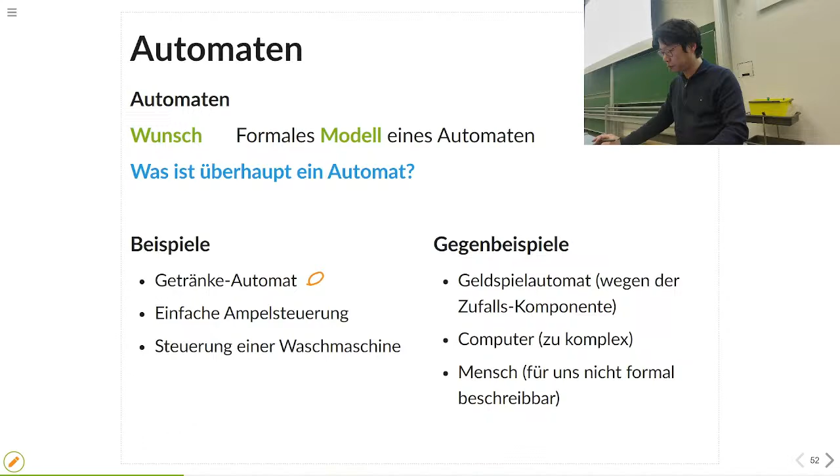Das brauchen wir Automaten. So, was bedeutet hier? Wir brauchen ein formales Modell vom Automaten. Automaten kann man schon früher bei Getränke kaufen oder Snack kaufen kennen. Das geht natürlich mit solchen Automaten und man kann auch mehrere Dinge damit steuern.

So, was ist ein Automat? Wir können Automaten benutzen, sodass wir Eingaben verarbeiten. Automat erzeugt auch eine Ausgabe. Es ist immer in einem Zustand an jedem Takt. Als Arbeit eben nur immer in Takten, und es ist ganz deterministisch. Wenn wir gleiche Inputs, gleiche Eingaben haben, produzieren wir immer gleiche Ausgaben. So, was ist ein Automat?

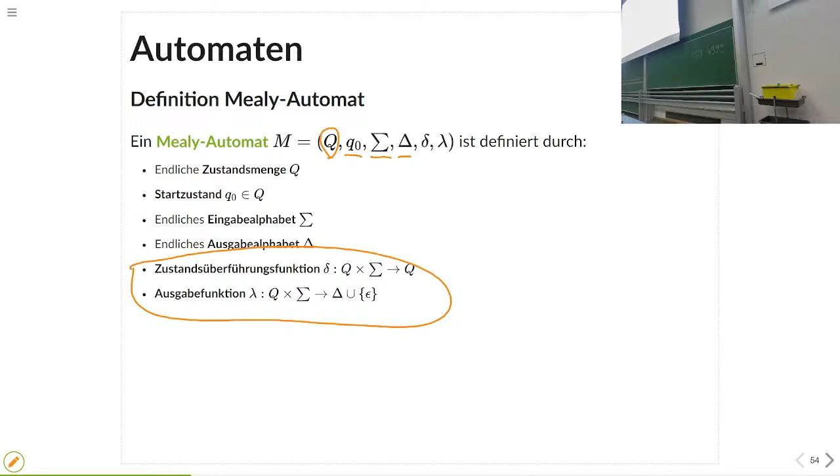Und dann haben wir zwei Dinge. Erstens ist diese Zustandsüberführungsfunktion. Wir sind jetzt in einem Zustand. Wenn wir eine Eingabe bekommen, sollten wir zum anderen Zustand übergehen, und wir definieren solche Überführung mit der Funktion Delta.

Delta, kleines Delta, ist deswegen ein Cartesian-Produkt von Q, also dem Zustand wo wir jetzt sind, und dem Eingabealphabet. Also Q mal Sigma. Für jedes Q, für jeden Zustand und jede Eingabe sollten wir zum anderen Zustand gehen oder gleich im gleichen Zustand bleiben. Das ist eine Funktion mit zwei Eingaben, ein Element von Q und ein Element von Sigma.

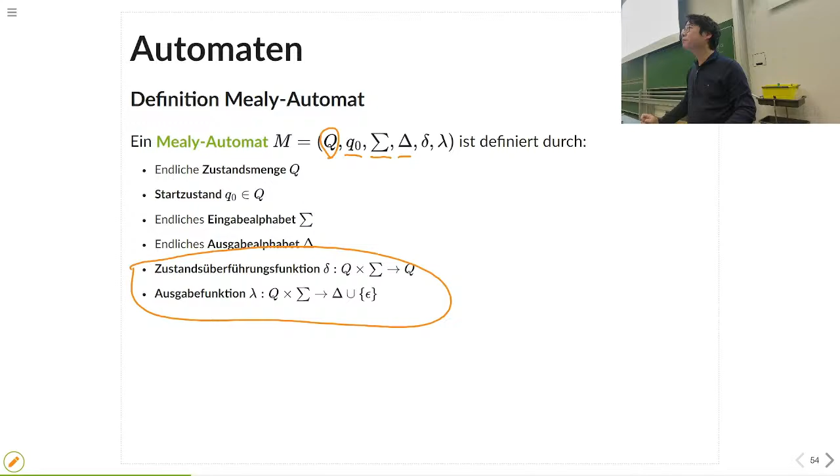Großes Q ist unsere Zustandsmenge. Großes Sigma ist unser Eingabealphabet. Die zwei zusammen nennen wir Eingaben, und es ist eine Funktion mit den zwei Eingaben. Dann produzieren wir einen neuen Zustand, und dieser neue Zustand ist unser Ziel. Wenn wir in diesem Automaten in einem Zustand sind und eine Eingabe von Sigma bekommen, dann gehen wir zu einem neuen Zustand. Okay, bisher ist es alles in Ordnung oder nicht?

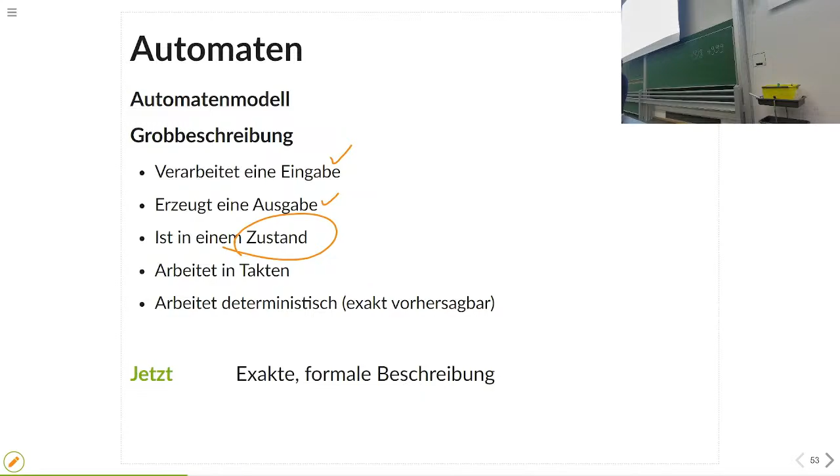Ich nenne noch einmal zurück. Wir haben ein Automaton. Was ist ein Automaton? Es gibt Zustände, es gibt Eingaben, es gibt Ausgaben. Wir nehmen an, dass wir endlich viele Zustände haben. Diese Menge, diese Elemente von Zuständen, ist die Menge Q. Dann haben wir alle Zustände, und dann haben wir ein paar Eingaben, Sigma.

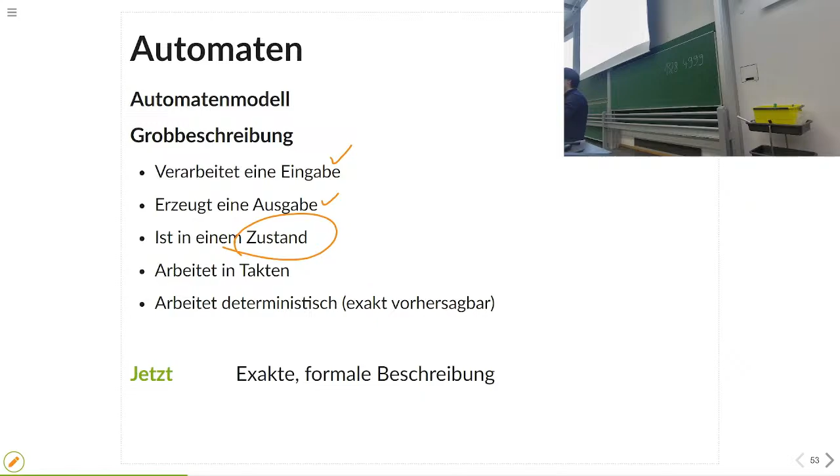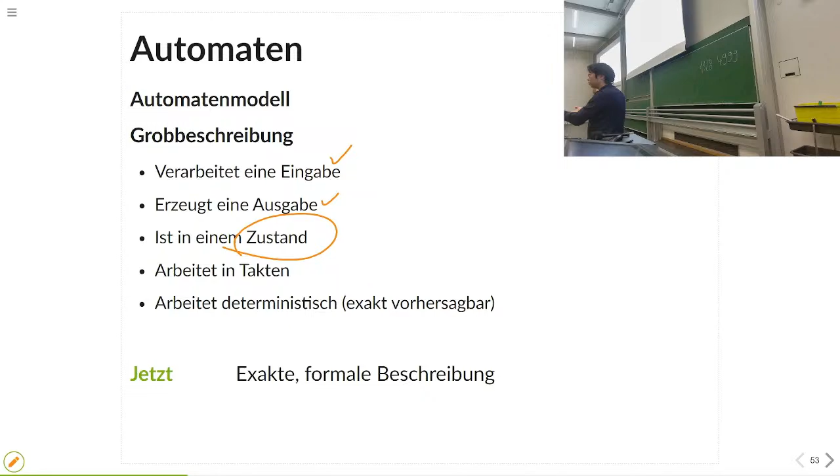Für jeden Zustand gilt: das Automaton kann zu jeder Zeit nur in einem Zustand bleiben. Deswegen müssen wir, wenn wir eine Eingabe bekommen, von Zustand zum Beispiel kleines Q mit Eingabe 1, entweder zu einem neuen Zustand führen oder im gleichen Zustand bleiben. Deswegen brauchen wir diese Überführungsfunktion. Das ist mit Sigma, mit Delta definiert.

So, bis hier alles in Ordnung oder nicht? Wir haben von hier bis hier schon diskutiert. Any question about it?

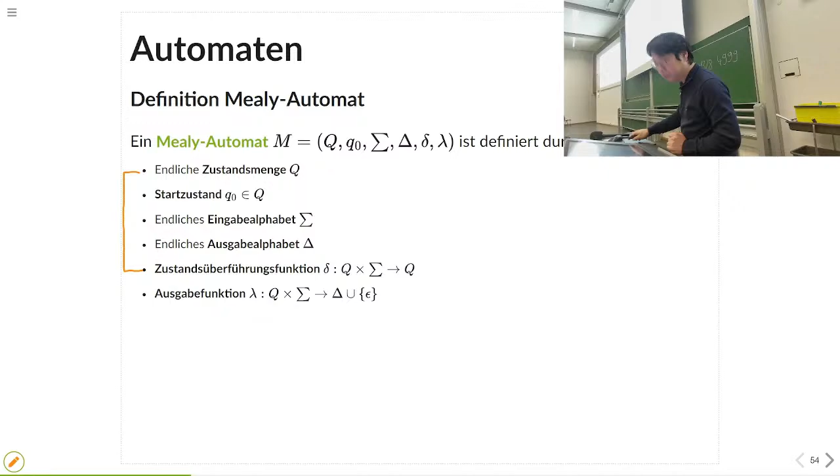So basically, if I understood it correctly, kartesisches Produkt von Q and Sigma, so basically it's like here a combination of the state and so let's say I have 10 states, I have 2 inputs. So if you are in state, you have 10 states encoded from 0 to 9, 2 inputs encoded as A and B. If I'm in state 0, I receive A, I have to go to state 9. Okay, I have to define the transition of the automata according to the current state and the input it receives. How do I move to the next one? Think about how you design automata. It's always like that, yeah.

So it kind of depends on the input and... No, the previous... you have to define everything starting from the states you have. If you are in state X, you receive input A, where do you go? You have to define that, and you have to define that completely. So either you go to the next state or you can stay in the same state, or you have to change to a new state.

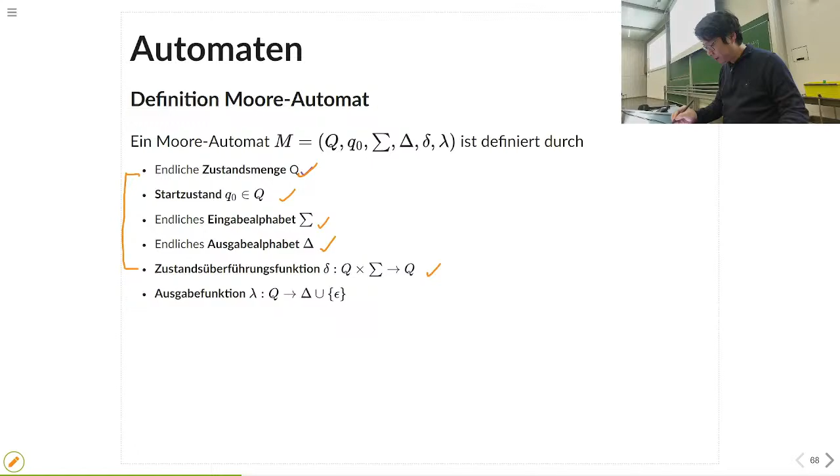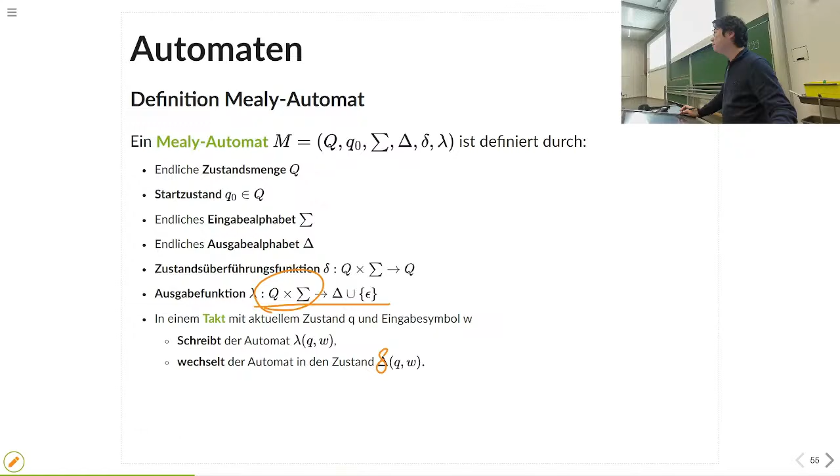This is the Moore automaton. Take a picture on your phone. Let's go back to the Mealy automaton. Take a picture here. So this is a Cartesian product of Q and sigma. Moore automaton: simply Q. Haha. Okay.

So now, what does that mean? In a Mealy automaton, we describe what to produce at the edge of the transition. In a Moore automaton, we describe the output in our destination, in the node.

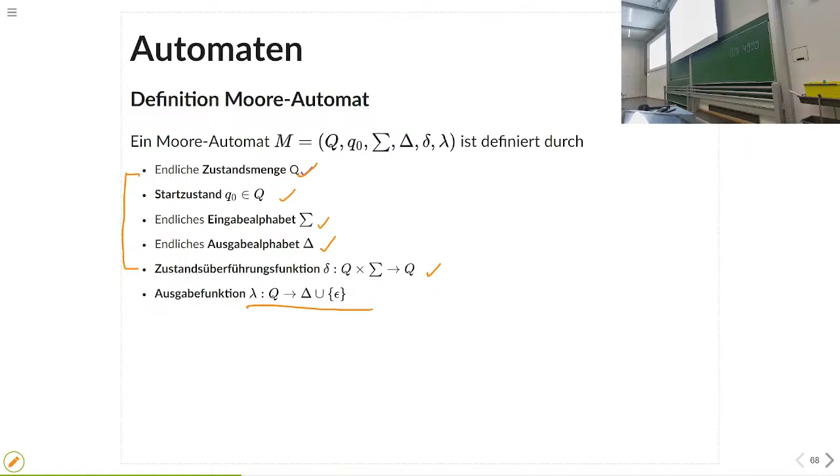Okay, so repeat that again. What does that mean? Your output function is defined at your state. When you enter this state, you produce one output. So that means that if I move from state A to state B, I produce one output of state B. If I further move to state F, I produce an output of state F. I further move to state Z, I produce the output of state Z. If I further move to state S, I produce the output of state S. I don't care where you come from, I just produce the output at the destination.

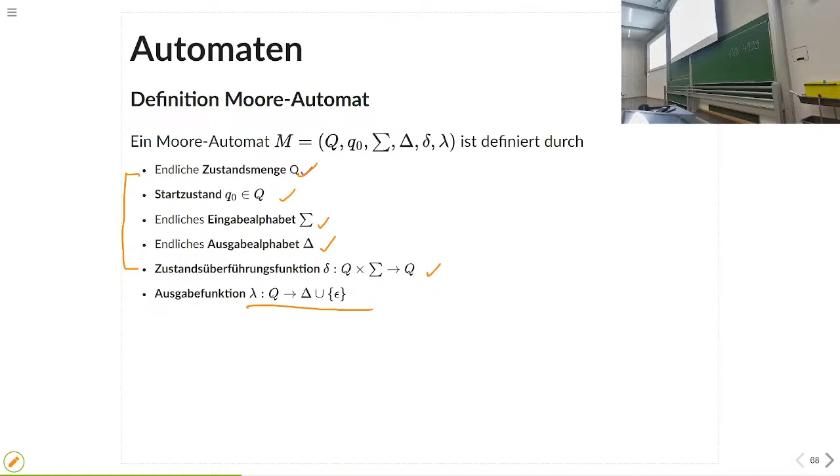Seems that we are losing our signals from time to time. Okay? Any question?

So the new state, not the old state. So what do we do? We are at a state Q, and we have an input W, so it's the same as the Mealy automaton. Okay, so we again first write the output. Where can we see the output? We know that we are going to move to the destination. This destination is described as node delta of Q, W. So we just produce that. And then we change to the new state. It's the same as before, but we don't label the output at the edge. Instead, we label the output in the destination node. Okay?

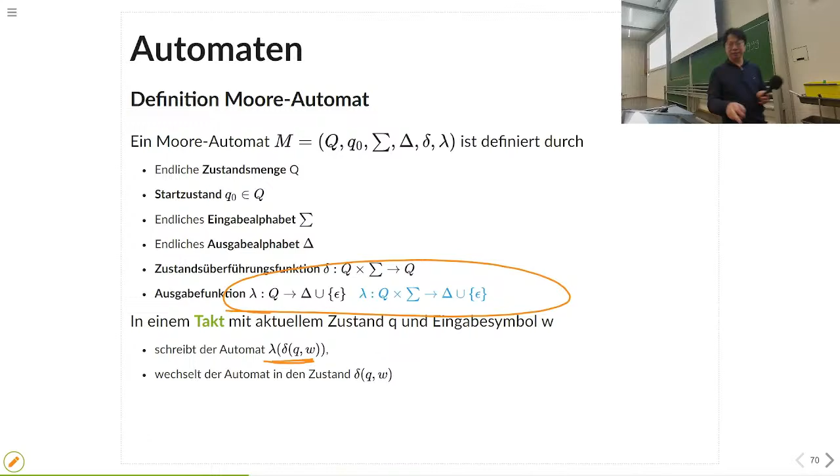Which one is better? This is the question I like the most. Whenever we introduce two models, we ask ourselves, why does he have to talk about two models? Which one is better? Or which one is easier to understand? Or are they the same or are they different? Let's start from the case. Are they the same or are they different? They're different, huh? First, they are different. But do they have the same power or not?

Okay, what do I mean by that? We talked about equivalence earlier, right? So two Mealy automata are considered equivalent if for every input they produce the same output. Okay, so we ask the same question.

Is it possible that there's a case where we can only use Moore automata, but we cannot use Mealy automata? Or we can only use Mealy automata, but not Moore automata? Or they are different in a way that there are problems that can only be described by Moore automata but not Mealy automata, and problems that can only be described by Mealy automata but not Moore automata.

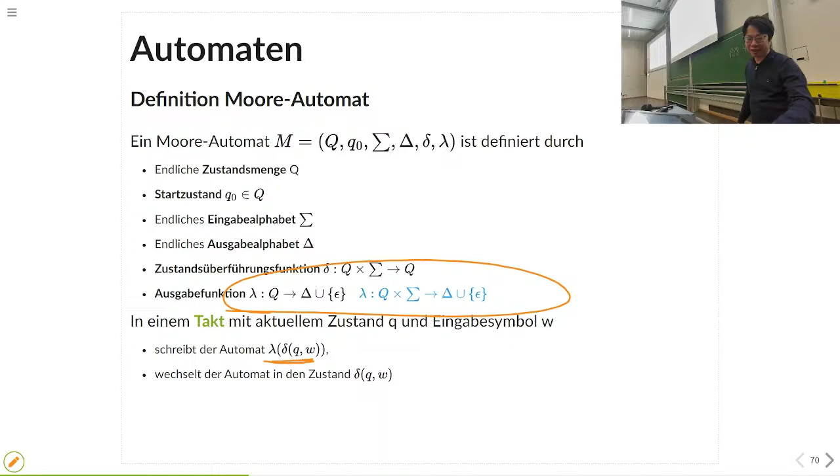Okay? If the question is a Mealy automaton, don't answer with a Moore automaton. If the question is a Moore automaton, don't answer with a Mealy automaton. Okay, good. So, the first one is easier. For every Moore automaton there is an equivalent Mealy automaton.

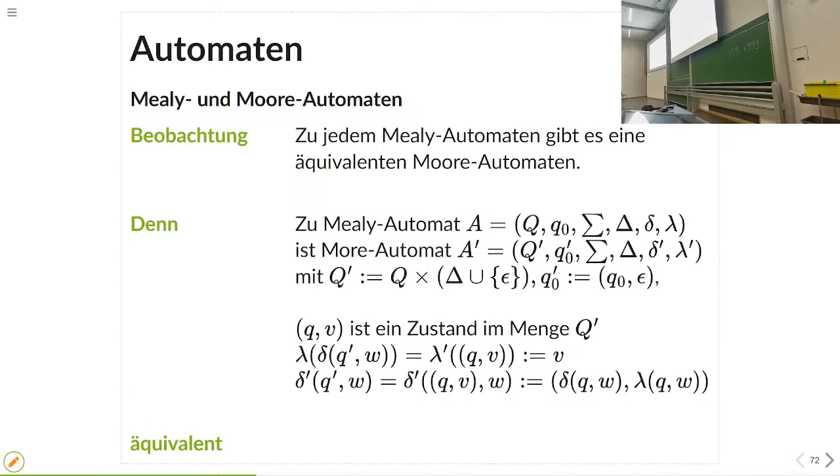What this automaton does is that if you have consecutive zeros, it will always produce 0. When you switch from 0 to 1, the first time it will still produce 0. The second time it will start to produce 1. So this is data filtering. Is that the term or not? You basically filter the isolated bits from that string.

So you have 0, 0, 0, 1, 0, 0, 0, that 1 would become 0. If you have 0, 0, 1, 1, 1, 1, the first one would be 0, the rest would be 1. Okay, so that's what the automaton does. And then you say you have 3 states: 0, 1, and an uncertain state. Let's call it question mark.

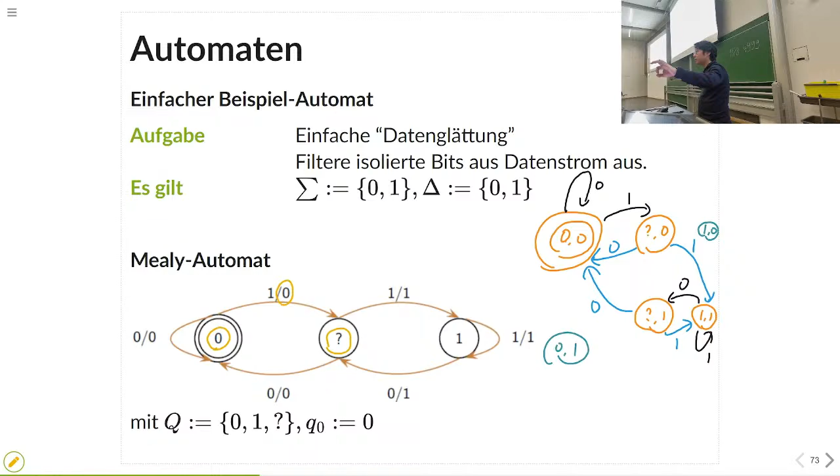Now, what did I do next? Next, originally, you move from this state 0 with this 1, output of 0. That means that if we want to produce this one, we are going to switch to the question state that has a specific output of 0 labeled there. And we are going to say, if I receive 1, I'm going to switch there. Okay? So I just look at the original Mealy automaton. And for every state and every output I produced, I'm going to check which input is needed to switch there. And I specify all of them. Okay?

And by doing so, we create a Moore automaton, and that has the same behavior as the original Mealy automaton. And so, what do we have?

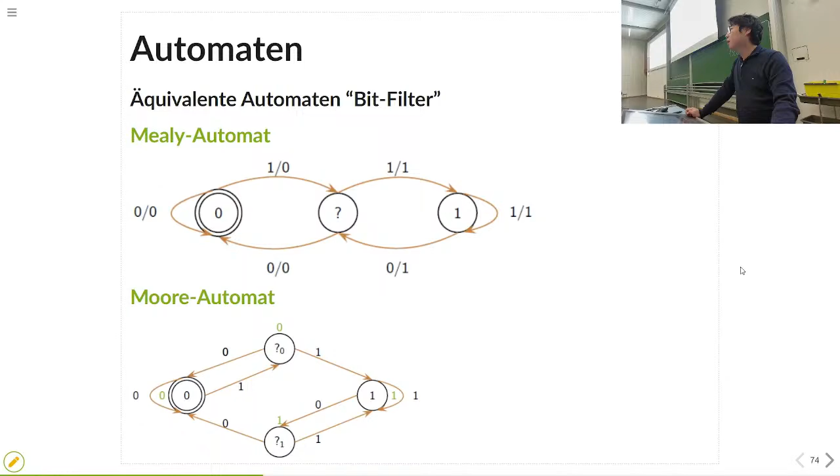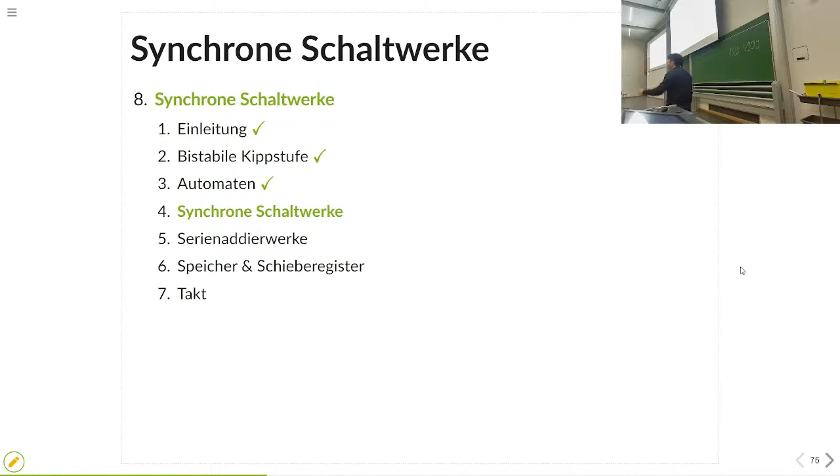Any question? So, why do we need Moore automata? I hope it's now clear. No, not yet. So why do we need Moore automata? Because it has this concept of ticks. In every tick, we produce the output, and then we change to a new state. The tick is basically relevant to the way we control our flip-flops or latches.

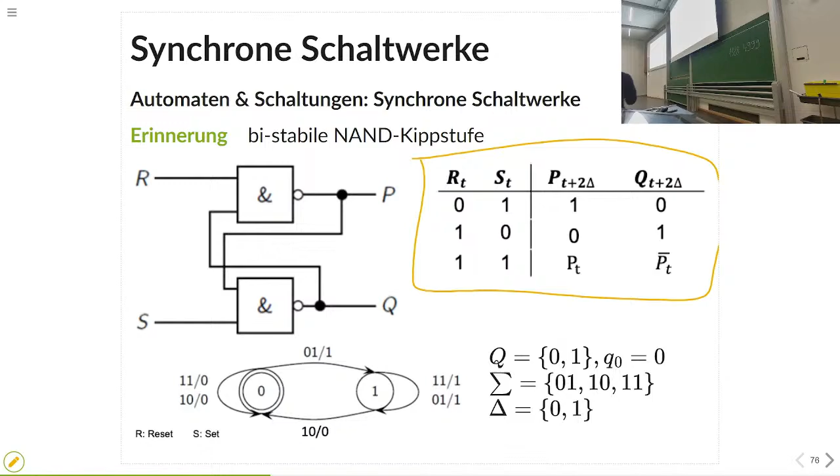So, now coming back to our latch. We had the latch defined earlier, and if we want to control it by what I said earlier, that we can set R and S, but we must set them at the same time, then the configuration of R and S will become our input. The state of this automaton can be used to describe the data that we store as 1 bit in that latch. And if we can control how we change the state of the system, then we can decide what the current state of the latch is.

So, as I said, we have 2 states describing what is stored in memory in this latch. Let's assume that we start from 0. We can control this with these 3 possibilities, 0, 1, 1, 0, and 1, 1 for R and S. And the output is the output of the memory. Okay.

So what we can do is that we can write down the memory. So if we are in state 0, we receive 0, 1. And let's look at the output of P over here. So when we receive 0, 1, the output will be 1. When we receive 1, 0, the output would be 0, and the memory goes to 0. So it goes here. Let me do it again. Sorry. So let me do it again. Okay. So we have the memory state 0 and 1.

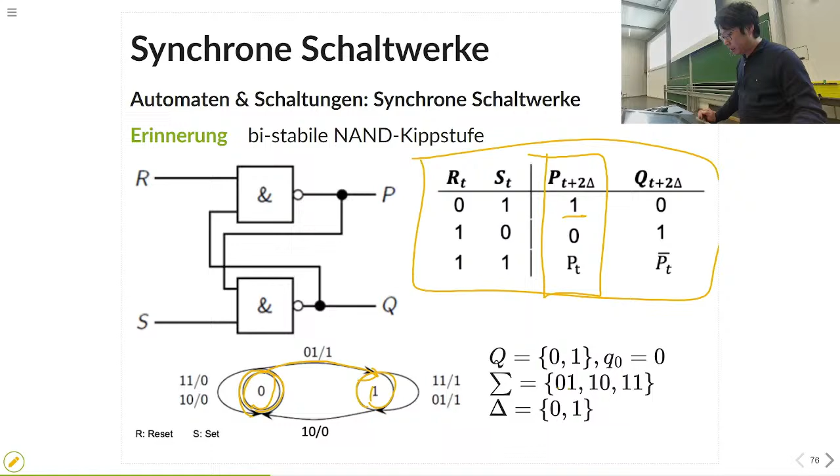So, but if you do so, it doesn't work because you don't have a tick signal. You need to tick that. How do we tick that? The latch we described earlier has no tick. We don't know when we can change R and S. It's possible that R and S are changed at the same time to 0, 0, which we don't allow.

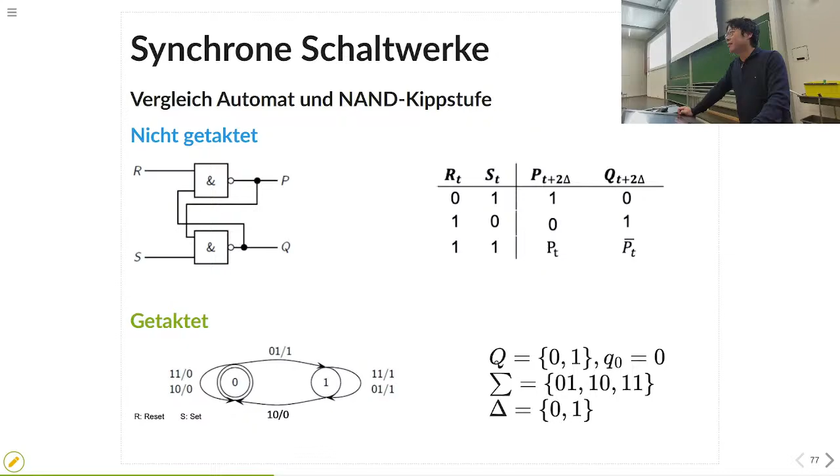So what can we do? We add one additional signal. The signal is called T. And there are different ways to do the signal. We are not going to talk about that here. I'm going to talk about that right before Christmas. One is called, I forget the first one. So there are 2 ways. One is called something I will figure out at some point. And the next one is called edge trigger. And the edge trigger can be triggered in a positive way or the negative way.

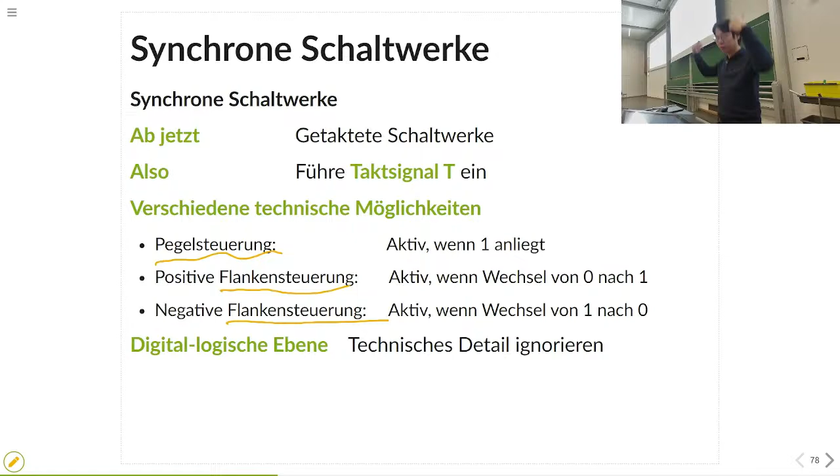So what is Pegelsteuerung in English? The other one is called edge triggered. So basically, the first one is when you switch from 0 to 1 and you are stable at 1, it triggers. Level triggered. One is level trigger, another is edge trigger. For the edge trigger, it can be positive trigger or negative trigger. So basically, one of these 3. We don't care about them. Let's say you take one of them. This is not the detail we want to discuss here.

So we have this additional part. Now we link R and S in addition to the tick signal, the clock signal. When the clock signal is triggered to 1, then you are allowed to change the values of R and S. And because you link these 2 together with the synchronous clock signal, you change these 2 signals always at the same time. Okay?

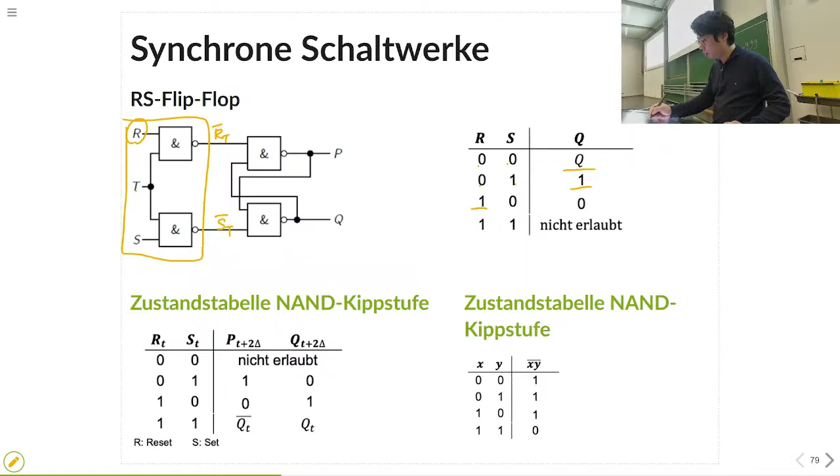Okay, so if R and S are both 0, then the flip-flop remains as Q. If R is 0 and S is 1, the flip-flop is 1. If R is 1 and S is 0, we set it to 0. So again, R is for reset, S is for set. If one of them is 1, then you prefer that one. So if R is 1, S is 0, you reset, so Q becomes 0. If S is 1, R is 0, you set to 1. If both of them are 0, the flip-flop is kept as it is.

Now it's time to talk about the name. The latch with 2 states did not have the clock signal. That is called latch. The flip-flop has the clock signal, and therefore you can use automata to model the behavior of R and S control. The reason why it's called flip-flop is that if you flip one of them, the other one flops. So it's never the same. You have 2 bits, and they are always different at any point in time. You cannot make them the same, because you don't want to be dependent on the speed of your gates.

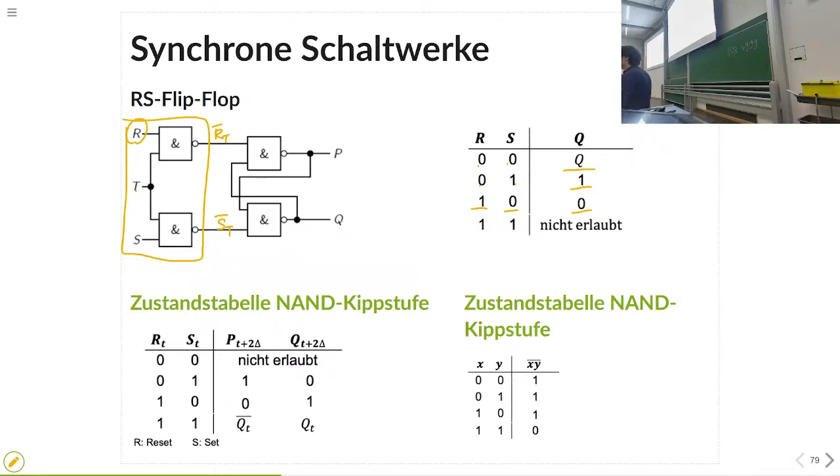The example we use here is the NAND flip-flop. You can also use a NOR flip-flop, so basically replace them with NOR. And this is therefore called RS flip-flop: reset, set, flip-flop. Any question for the flip-flop? First one. If not, let's do the next one.

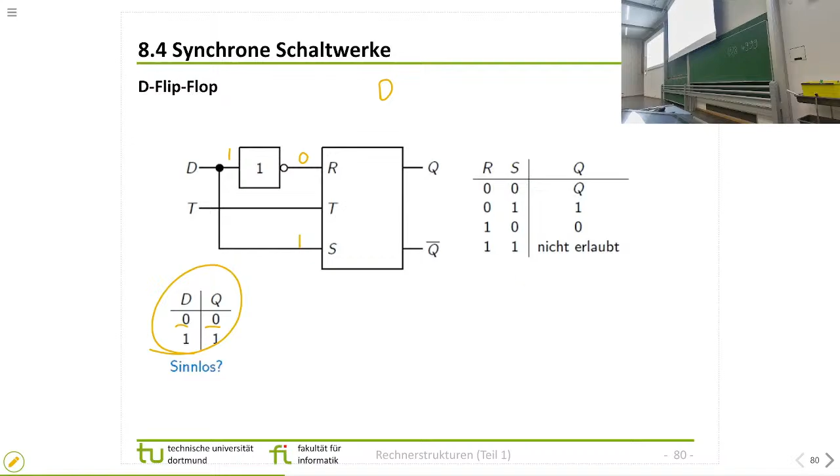Well, what does this have to do with us? Well, it's basically reset and set. We have to keep in mind that everything is ticked. That means that it's delayed by 1 tick. So if you use such a flip-flop, your flip-flop has the possibility to delay the behavior by 1 tick with the clock signal. So it's called delay flip-flop.

When we look at the RS flip-flop, we may ask ourselves, well, we look at the 3 steps: reset, set, and keep the same value. Is it possible that we take a negation of the current status or not? So RS flip-flops allow us to do reset, set, and remain the same value, keep the flip-flop as it is, but we may want to do the negation.

Okay? Let's create a new flip-flop for that. Then we have all possibilities. So I will basically reset to 0, set to 1, keep as it is, and take a negation of it. What else can you do to control 1 bit? You cannot do anything more, right? Then, if we can allow the possibility to take a negation, then we basically have the complete function to control 1 bit. Okay, so let's have a look at this idea of JK flip-flop.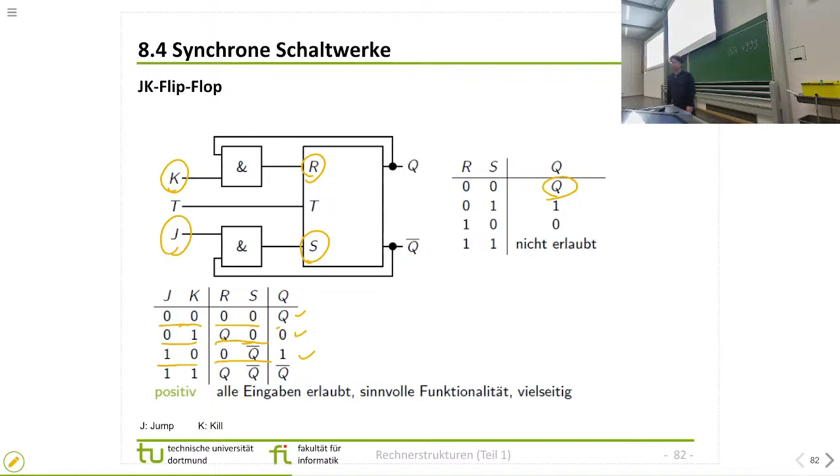So basically, if R is 0, S is 1, 0, 1, then Q is 1. If R is 1, S is 0, then Q is 0. So basically, we reach this negation of Q. So JK flip-flop allows us to have the 4 possible states over here.

We can also take this T flip-flop. T flip-flop is basically the status. If T is 1, you toggle it. You take a negation of Q. If T is 0, then you keep it as it is. So T flip-flop basically can be implemented by JK flip-flop by making sure that if T is 0, you go here, and if T is 1, you go here as well.

So the T flip-flop. We have talked about 4 types of flip-flops: RS flip-flops, T flip-flops, JK flip-flops, and D flip-flops.

Why do we need to talk about that? We want to use the flip-flops to control a memory such that we can use the automata to control what we do with the memory. What's important for us is not the values of those flip-flops, but what we actually get after putting the control signal in.

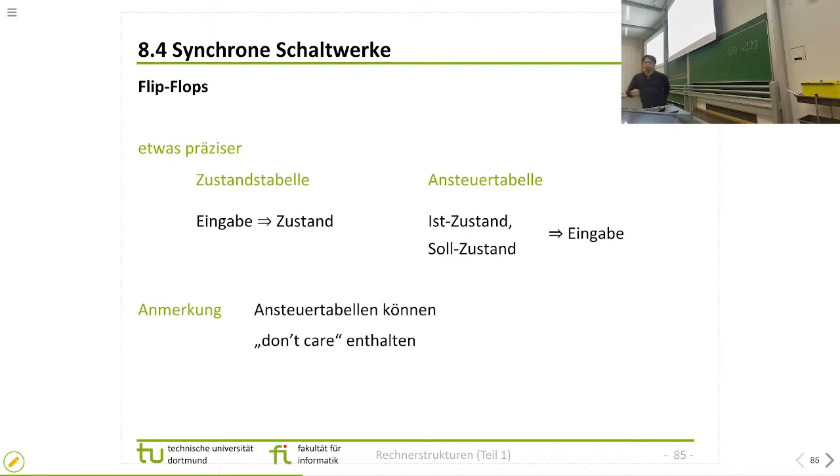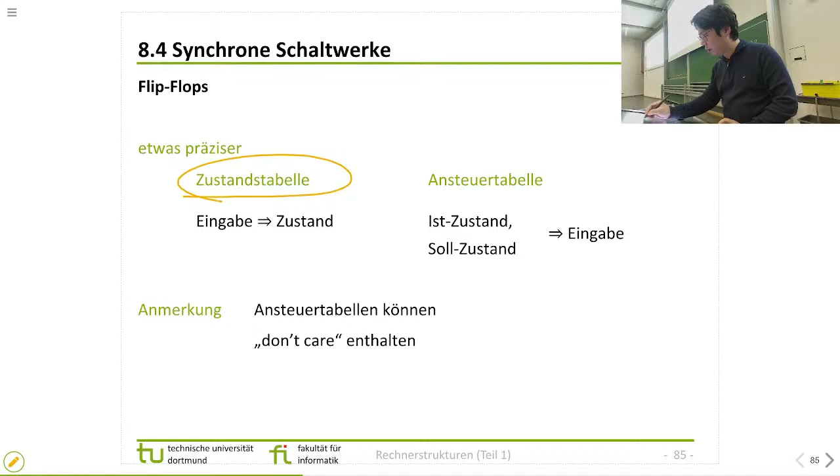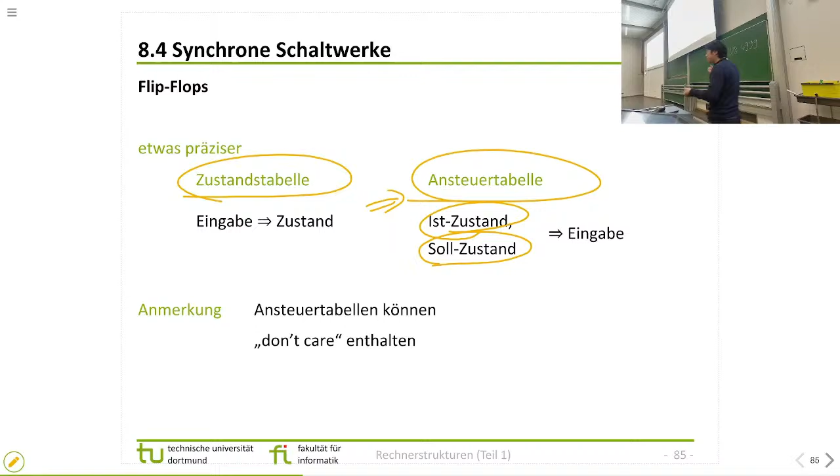So let's assume we have the Zustandstabelle (state table). Then we want to change that to look at the control table. What is the control table? We have the current state and the state that we need to go to. Therefore, we need to consider how we design our signals of J, K, R, S, or D or T to make sure that we are able to control the flip-flops correctly to implement the computation using memory. Is that clear to everyone?

So we have talked about the memory so far, right? We looked at the RS flip-flops, JK flip-flops, D flip-flops and T flip-flops. The key important thing is that if we want to implement 0 plus 0, and use a carry bit as our state, then what's important for us is to control how we store the information to that single bit in our flip-flop. So what we need to do is build the control table of our flip-flops.

Can you pass to me? So basically this new table is a replacement for that Zustand-Tabelle.

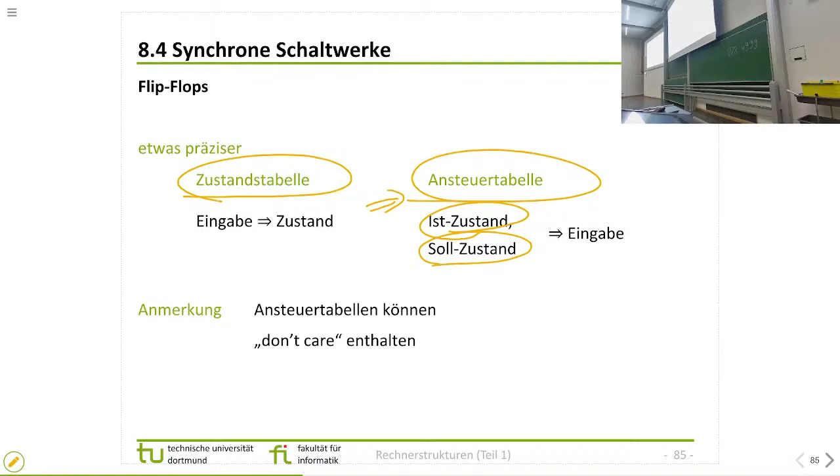Let's look at the next one. So what do we need in this table? We have the old Zustand (state). We are looking at 1 bit. So far we only have 1 bit, and we're going to stay with this 1 bit for a while. So if we have a D flip-flop, we have this status table.

But for us, what's important is to control that control signal. We are going to move from an old state to a new state. If we want to change from old state 0 to new state 1, we need to know which control signal to put to the flip-flop. If it's 0 and ends up with 0, we should put D to 0. If it's 0 and ends up with 1, we should put D to 1. If it's 1 and we want to change to 0, we should set D to 0. If it's 1 and the new one is 1, we should put D to 1. For D flip-flops, you are basically setting it directly, it's only delayed by 1 tick. You can ignore the old state.

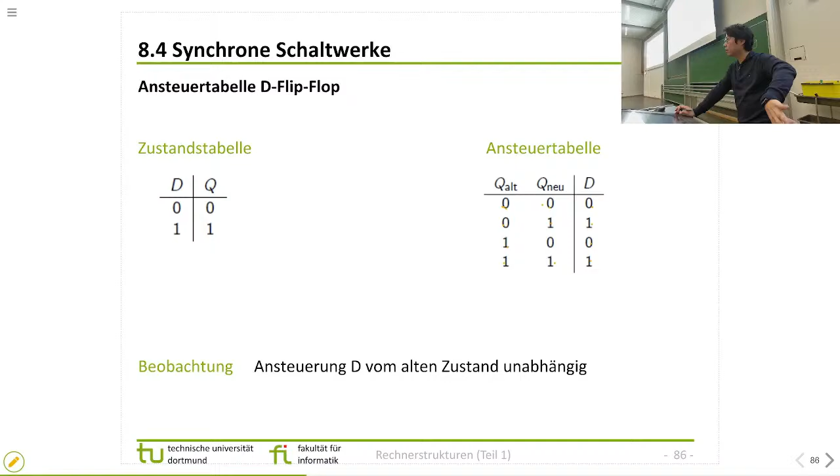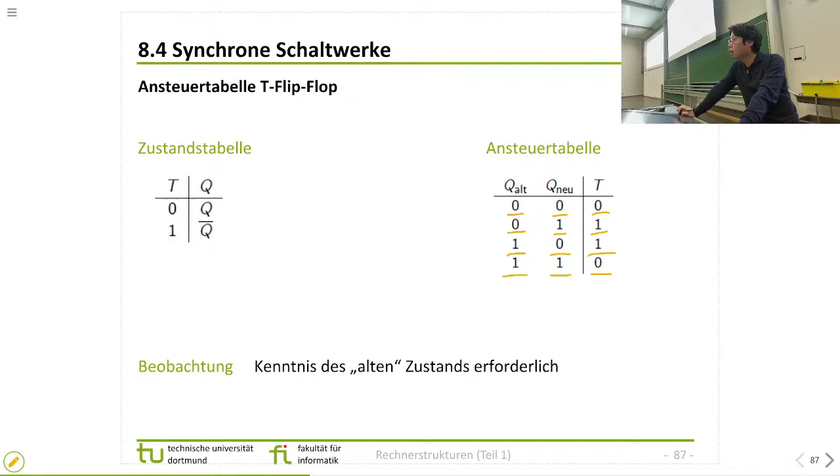But if you look at the T flip-flop, it will be different. If you are originally 0 and want to move to 0, you set T to 0. If originally 0 and you want to move to 1, you set T to 1. If you are originally 1 and want to go to state 0, you set T to 1. If originally 1 and you go to state 1, you set T to 0. So if you are controlling a T flip-flop, you need to take into account the old state. Now let's look at the RS flip-flop.

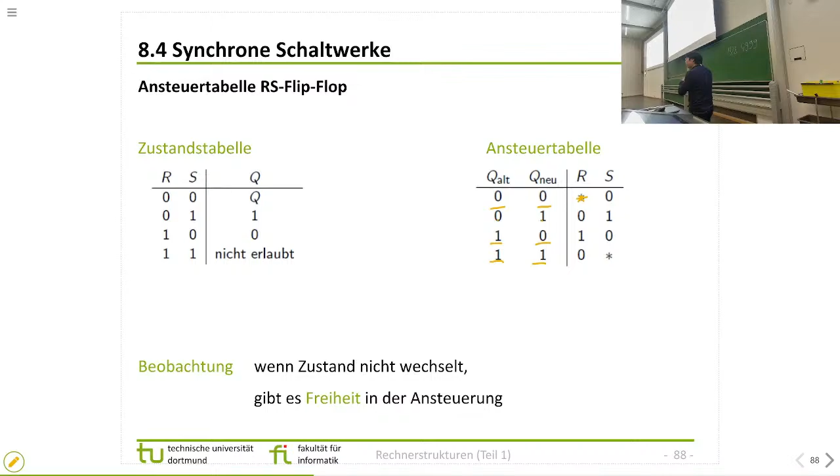If you are moving from 0 to 0, you have 2 ways: you can keep yourself as it was, so originally 0, you can keep it as is by putting R, S to 0, 0, or you can put R to 1 and S to 0. So R can be 0 or 1, you have the freedom to take either. If you are originally 0 and want to change to 1, with an RS flip-flop, you have to set it: R is 0, S is 1. Originally 1 and you want to move to 0, you have to reset it: R is 1, S is 0. If you keep as is for state 1, R is put to 0, S can be 0 or 1 — you get freedom for some options.

Let's look at the JK flip-flop, which is more interesting. For the JK flip-flop, if you keep the same, you can kill it, or you can just keep it.

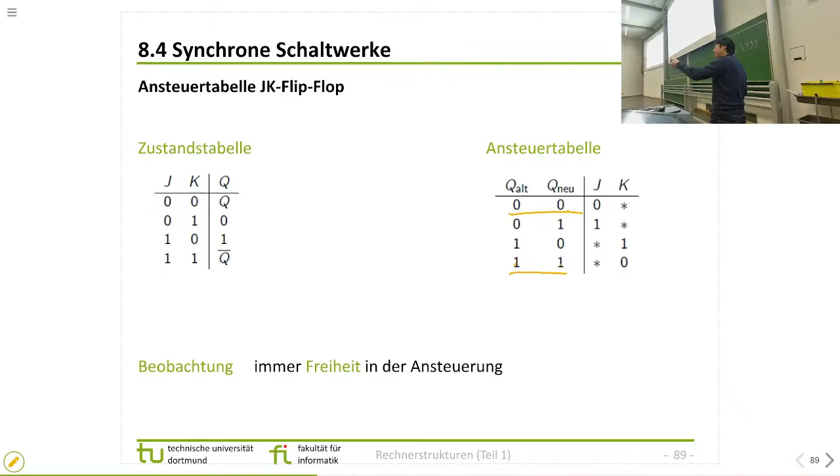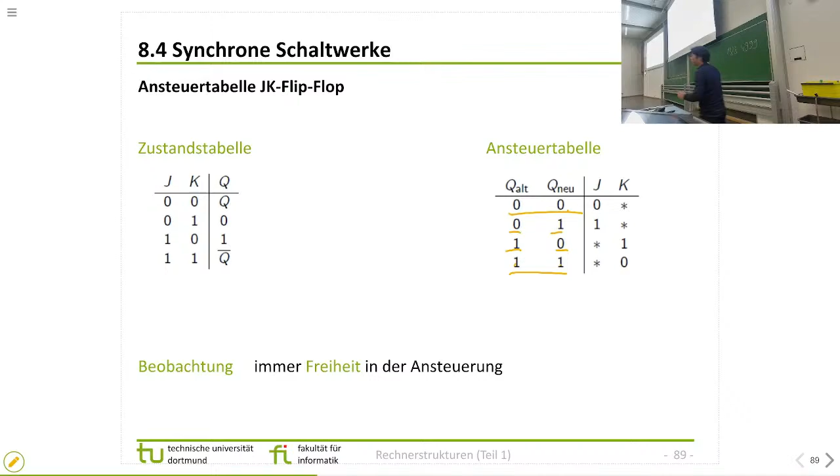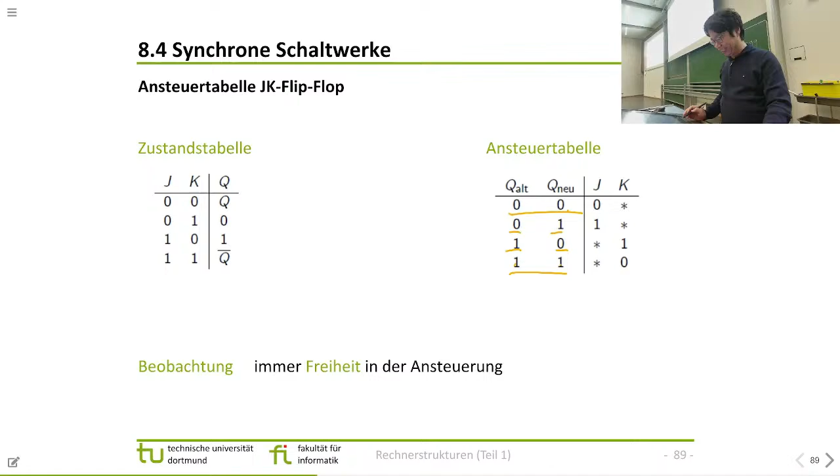Okay, I think I can finish that. So, why do we need that one? Let's finish this one. I need roughly 10 more minutes to finish this. Am I too ambitious or not?

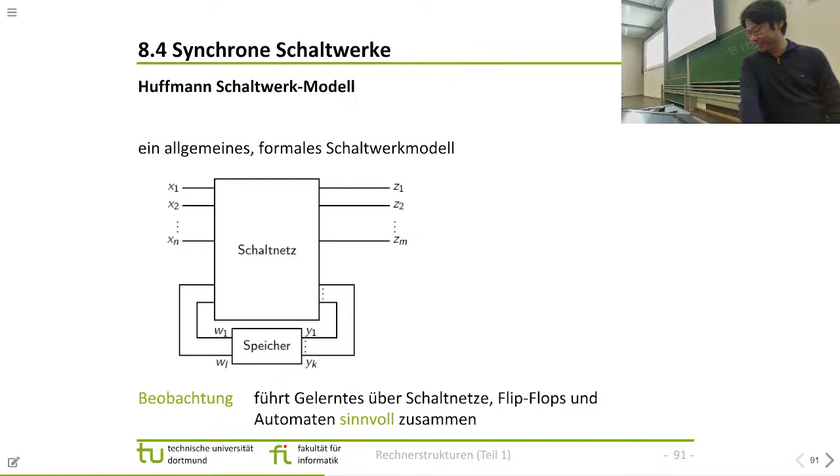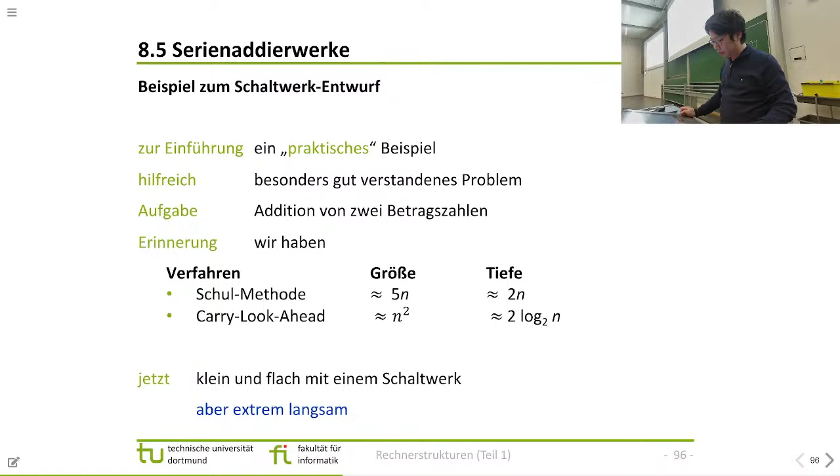So what we want to do is design an n-bit adder. You learned how to do this earlier using the carry look-ahead method, 5 weeks ago we talked about that. Or you can do this with a ripple adder. So now we want to have a creative way of doing that.

We only use 1 bit of memory, and that bit of memory stores our carry bit. So I'm going to add from the last position, and the status of the carry bit will be our state. It produces the sum bit. Every time I add 2 bits, the sum bit is produced. The carry bit is my state, which I use for adding with the other 2 bits in the next round. Okay, let's see how this works.

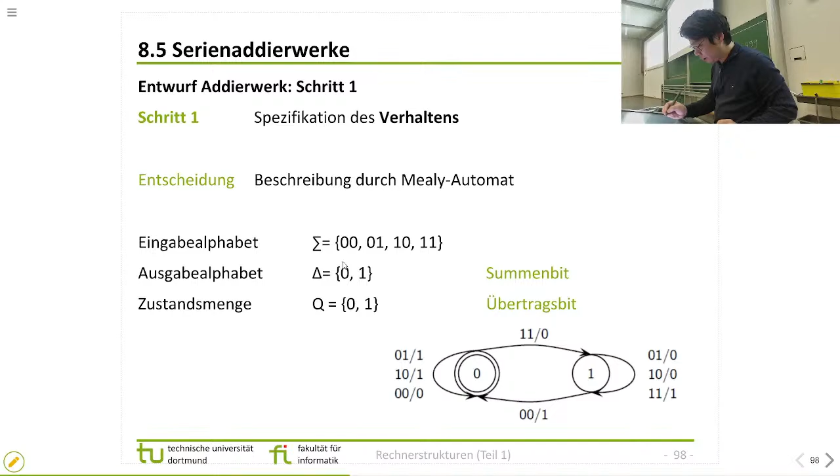So we have the 2 bits that we add together with the state, the carry bit. The carry bit is either 0 or 1. We have 4 input combinations: 0,0; 0,1; 1,0; 1,1 - the 2 bits we are going to add together with the carry bit. Now the output is our sum bit, the sum of the addition of the 3 bits: the 2 bits from the inputs and the 1 bit in memory that we store as the carry bit.

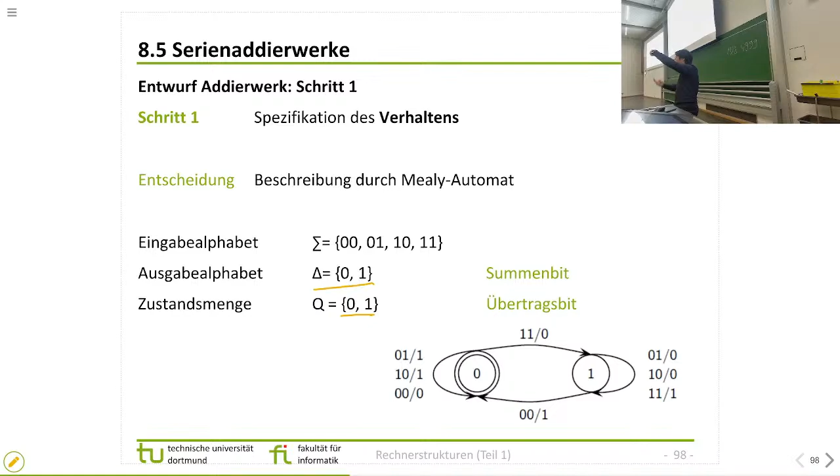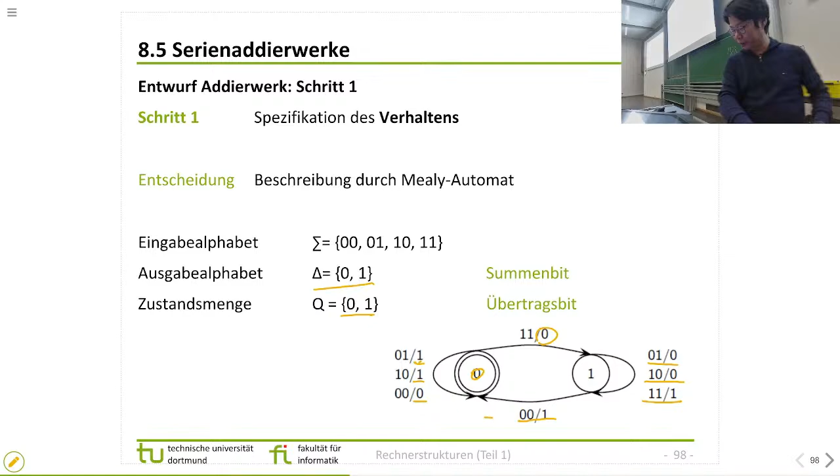So now what we need to do is put everything together. How should we do it? Let's do the second step. We have the input of 0,0,0,1,1,0,1,1. We have the codomain of our output as 0 and 1, and the codomain of our Q as 0,1. So basically straightforward. Now let's look at what we have in our automata, in our table.

So this is our old state of the carry bit, and this is our new state of the carry bit. So we want to use JK flip-flops. The reason is you can also do this with any flip-flop you want, but JK has the most freedom. So let's use the JK flip-flops.

So I have state 0 going to 0, state 1 going to 0, state 0 going to 1, state 1 going to 1, right? What I need to do is just write down the table. So let's look at these two and look at the reference of this one.

By the way, you don't have to memorize the table. I think we promised in the past that this is not relevant. I mean, you will get a hint anyway. The purpose is not to create this one, the purpose is to understand it. Depending on which assignment you get - if your assignment is to design this circuit, you will be supported with this. If your assignment is to derive this table, then of course you will not get a hint there.

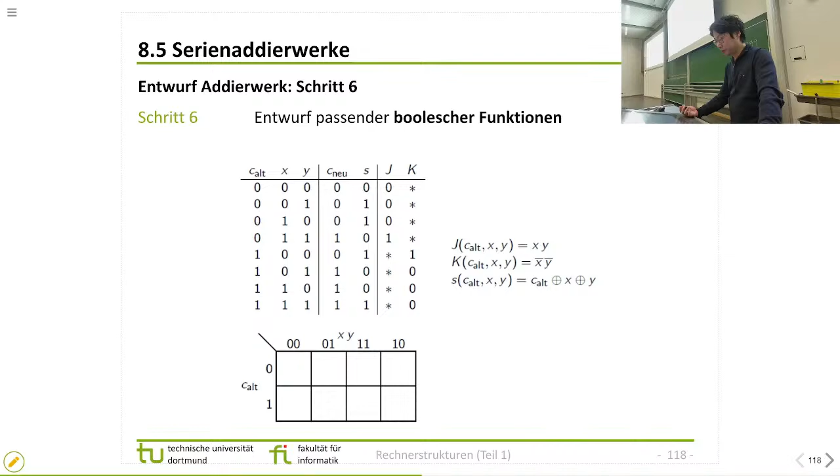And then the sum bit is basically the exclusive OR, right? We learned this earlier already. So finally, we produce this circuit. The circuit says that we do this x and y, and then J is basically xy, and K is not x, not y, and C, the sum bit is the exclusive OR of these three.

Okay, so we are done with this. But we need to have a circle, right? Everything is relevant to the memory. Where is our Q? So this is a JK flip-flop that we have here, right? So there's a Q and not Q. Okay, so where is our Q, by the way?

We are almost there. Yes, please. C alt is our Q. So that means that we are missing this final circle.

Okay, let me do it again. So what do we assume? We assume that we are looking at one bit for a carry bit. The carry bit is stored in our formula as C alt. Okay, the old carry bit. That means that, and we are going to use this bit again and again, right?

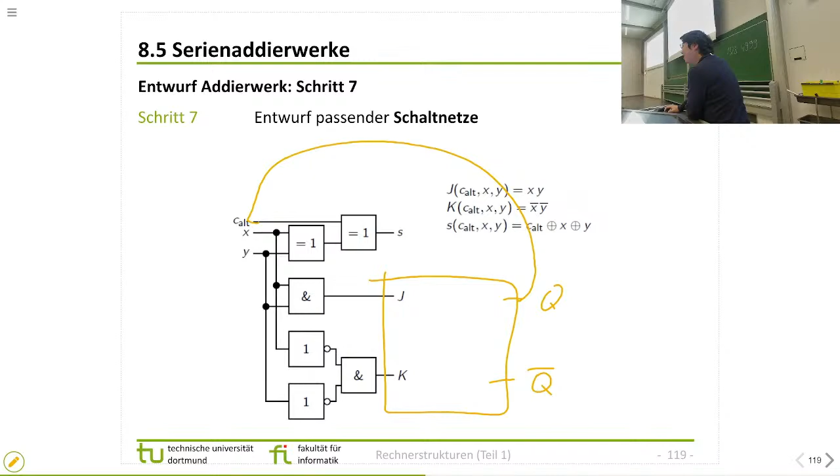Let's have a look at one example, and then we are done with this. So let's start with the initial state that our flip-flop stores 0. So 0 plus 1 plus 1. So what you will get is that 1 plus 1 stays with 0, and it goes in, and then your carry bit is set to 1, and you produce 0.

Then we receive an input of 1, 0. X is 1, Y is 0, and it goes like this. And then you go through the circuit. J is 0, K is 0. So J is 0 and K is 0. So your memory is kept as 1. But your sum bit is produced as 0.

In the next case, you receive 0, 1. And then it goes in again as 0, 0 over here. So your carry bit is again kept. You produce 0.

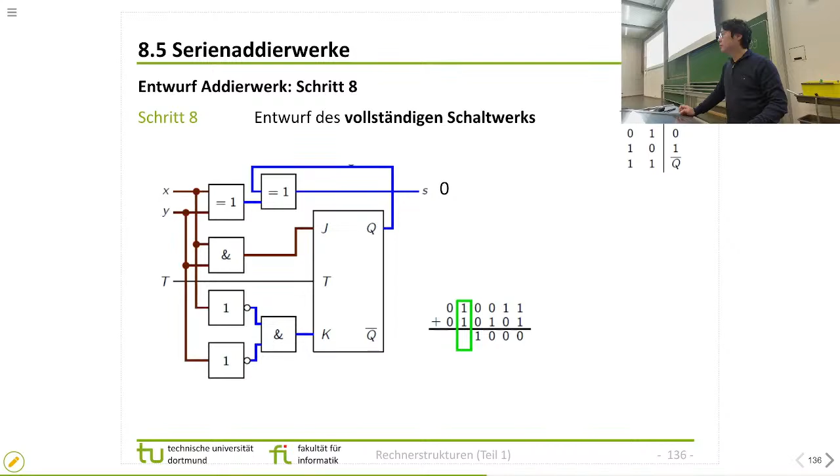Okay, and you go ahead. Now you receive 1, 1. Your JK flip-flop receives 1, 0. So it's jumped to 1. And you get an output of 0 over here, and so on and so forth.

Okay, so with this, in every iteration, you move on to produce the carry bit for the next position, and then you take the 2 new bits in the next position, and add them together with the carry bit, and then you produce the output accordingly. So this is very, very cheap, right? Because you only need 1 bit of memory to do that. In fact, that JK flip-flop has one signal T and then a few NAND gates. This is super, super cheap, but it's just super slow.

Okay, so any question about this? I'm sorry that I have to talk at the end in English, but I think if we do not do that, we are not able to reach this status. Next on Wednesday, I'm going to shortly explain this again. So the key idea is that you use 1 carry bit as your memory. You always keep the memory in mind, and when you receive 2 additional bits, you add them up. What you need to do is decide how you control the memory, depending on your original memory status and the 2 additional bits you receive. And this is what we have done today. See you on Wednesday.